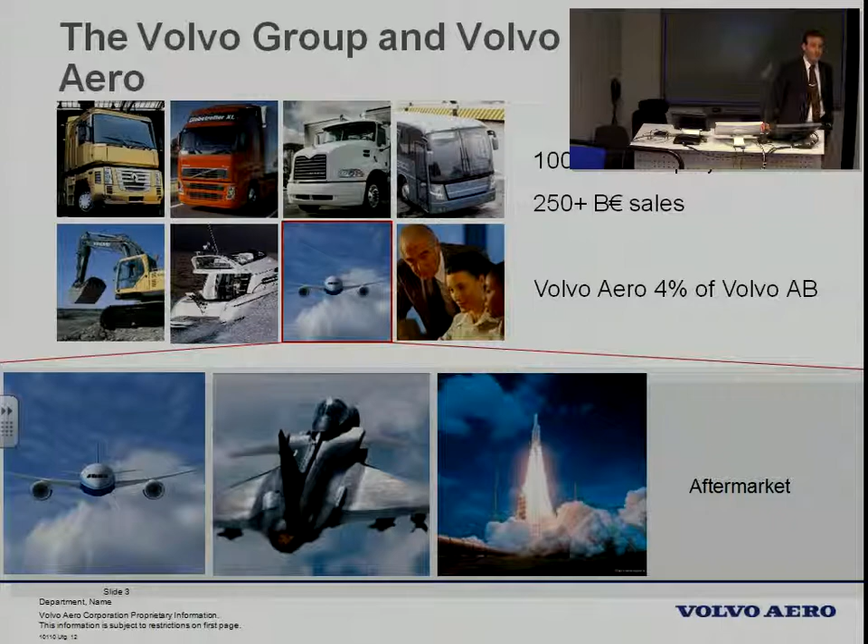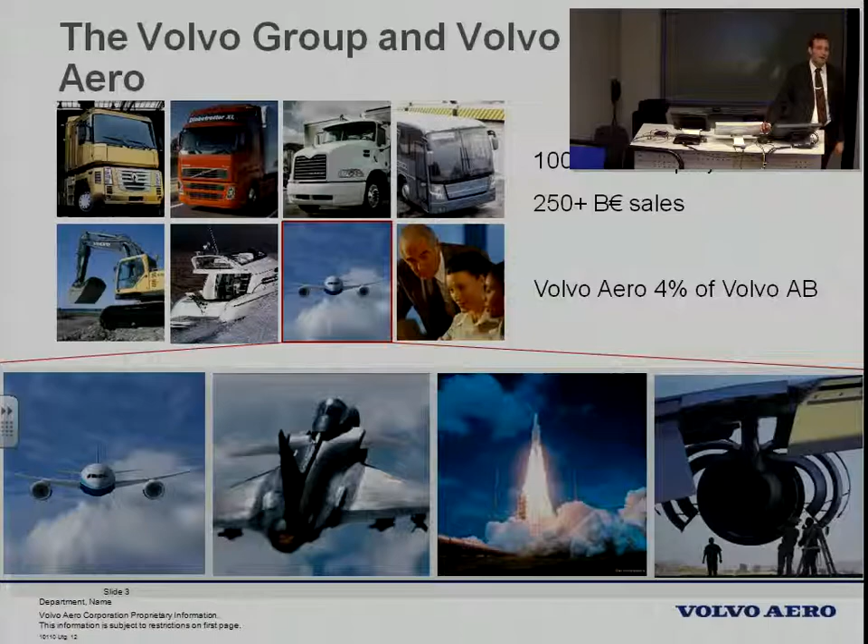We also have the military side, where we're responsible for the RM-12, which is in the Gripen or JAS aircraft. We also do some space applications, so we are actually the Swedish largest part of the space program in Europe. And we also have an aftermarket business which deals with repair and overhaul of entire aircraft engines.

So this is really what it's all about for us, that growth. It's a good word, and I choose it because it simulates, it's a symbol for the growth in the world. We are roughly 3 times as many people now than we were 50 years ago. Or to be more correct, the rest of the world outside Europe and US is 3 times as many. We are about the same. So that means that we are about 10% of the population.

During the Second World War, we were about half of the population in the world. And that's getting to us to some extent. There's a bigger market, there's also a bit of competition. So being in this growth world, doing business is quite good. That's quite especially if you look into traffic growth, it's been growing about 4% annually, with a few dips when recessions or incidents have happened.

But it also has some more subtle, or important, consequences. One thing on the safety side which is important is that the number of aircraft incidents or failures, the total number, may increase, although we actually have more safe systems. And that's a pedagogic thing to explain, because aircraft accidents are always reported.

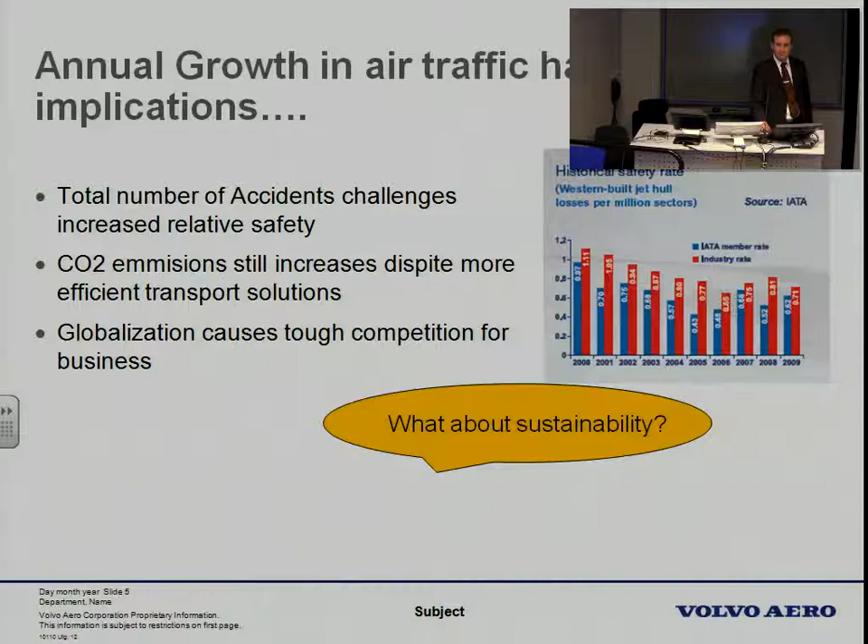Although we do things more efficiently, with better engines, we still have a problem with increased emission of CO2, for instance, because the growth is bigger than the reduction or efficiency gain. And obviously the competition thing is also there. So you can ask yourself if this is sustainable. Is this the way that we can continue to work? That's definitely something that we as individuals consider daily nowadays. But companies have a bit of a problem to relate to that, actually.

Anyway, there is a need for innovation, how to deal with these kinds of situations. And obviously, organizations, people, and companies act on this. Within our business, we follow some international agendas that we work with. In Europe, we have Acare, which has stated the promise of 20, or it should even be 50%, reduction of CO2 emissions until 2020.

And IATA, who is the aircraft or airliners organization, they have the vision to build zero-emission commercial aircraft by 2050, and also have a carbon dioxide neutral growth from 2020. If you break it down, it means an efficiency in terms of fuel efficiency that has to be on the level of 1% or 1.5% per year, every year. They have to become 1.5% more efficient.

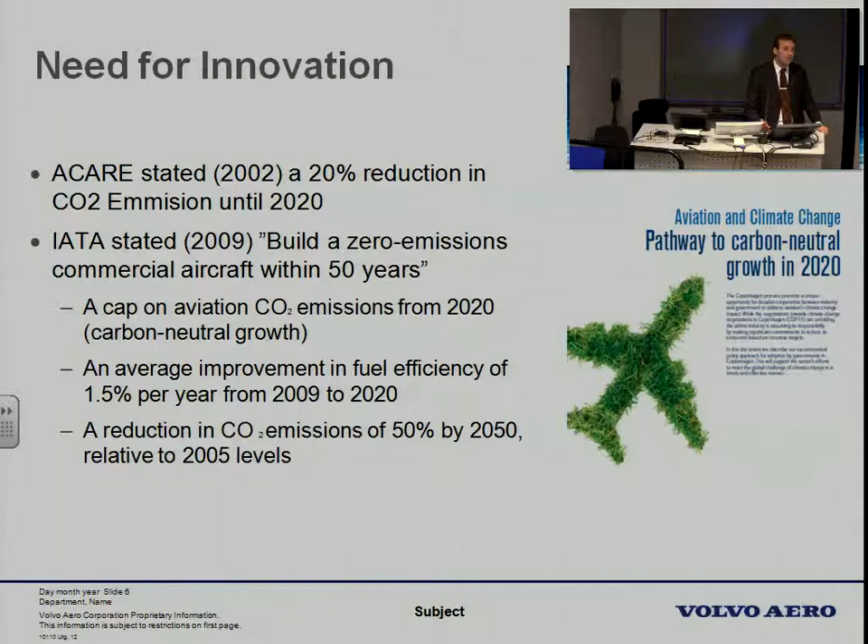They have stated this in these kinds of statements in agendas, and that's actually the policy that we follow when we do research, investments, and development. Acare, the other one, the European one, illustrates it like this — they did it a few years ago.

You can see the current CO2 emission, or actually the fuel consumption, which is quite close to that, listed from the 1970s — the aircraft that were launched around the 1970s, the Boeing 737 and Airbus 300, etc. They are still in operation, but they are being phased out. You can see how each generation of aircraft is getting more and more efficient per passenger.

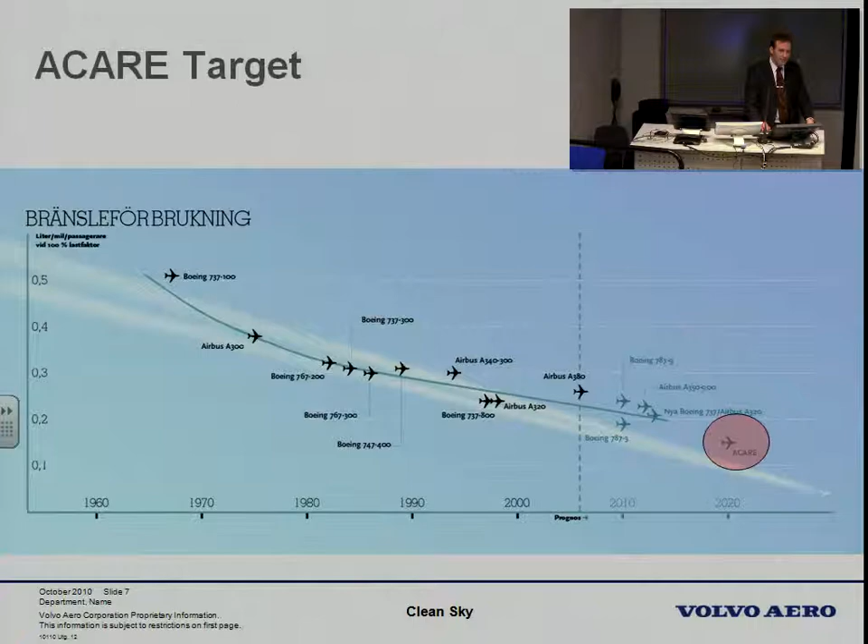The target, as you can see in the red area, is quite close and it's quite challenging. If you extrapolate a little bit, you can see that it's not an easy target to get. And 2020 is actually the engines and the aircraft that we are developing now.

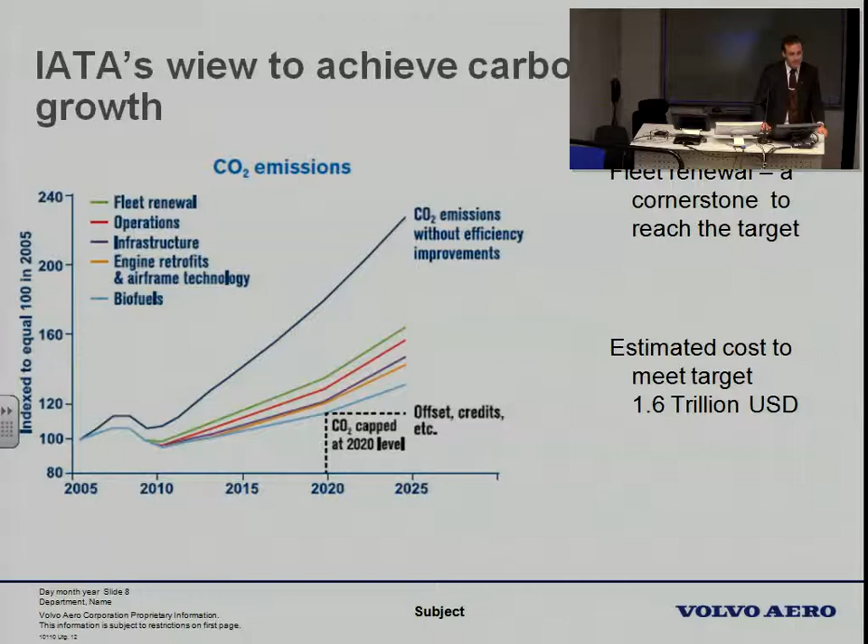IATA has a similar view. They've broken down how to meet these emissions. If you look at the large curve here, you can see how things would be if we don't do anything, if we just continue to let aircraft traffic grow without any action. The large gap down to the green line is actually fleet renewal, which means buying new equipment, and that's very good for us on the manufacturing side. There's a big incentive to buy new things and get rid of the old ones, so in that way it's a healthy thing. It's quite ambitious - these 200 airlines estimate they will spend $1.6 trillion to meet these objectives.

So again, to achieve this kind of growth in some sustainable way, or at least without violating too much, we really need to think a bit differently. So what are we doing?

I'll say some words about what we do in Europe on the European level. We have a large program, a very large framework program called Clean Sky. How many of you have heard about Clean Sky? A few? Yeah. They've organized a massive amount of resources in research to validate and develop new technologies that meet these targets. They focused especially on carbon dioxide and NOx, and also noise emission - noise is considered to be an emission as well.

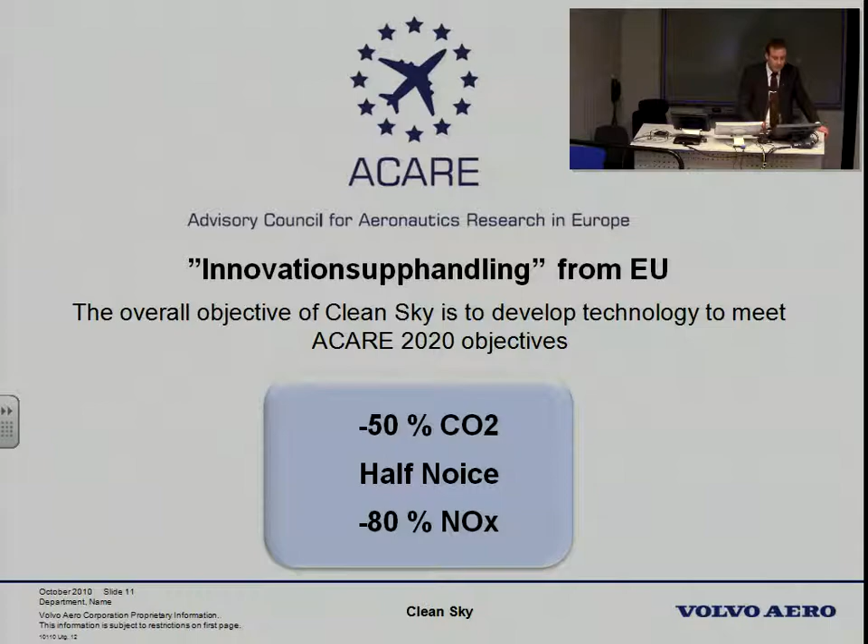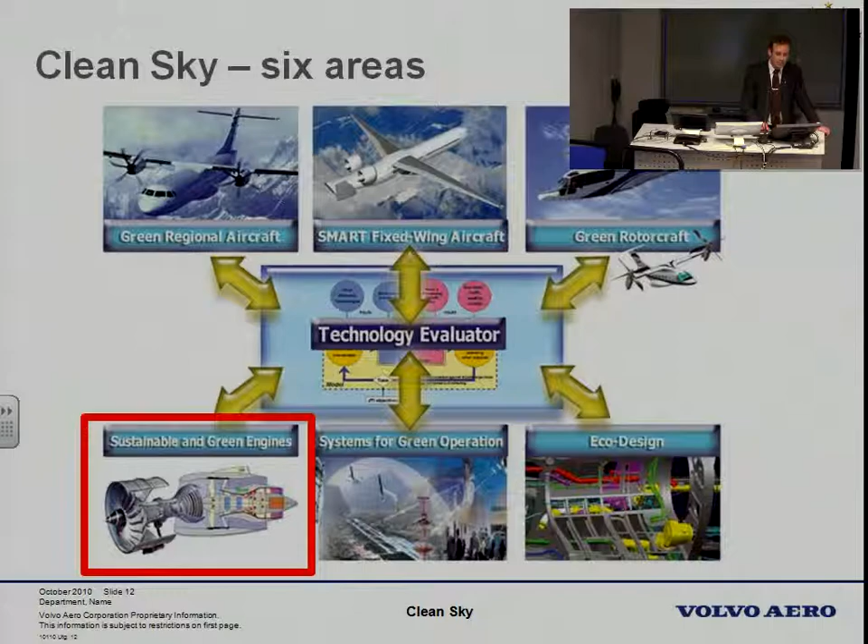So we are actually developing, together with our European partners, that kind of technology. It's divided into 6 areas. Several of those are on aircraft, on helicopters and equipment, and down there you have the sustainable and green engines, which is a portion of this initiative, where we develop several demonstrators - demonstrators in this case meaning building new aircraft engines that will be able to meet these kinds of objectives. You can see some of them. There are four, they're called Sage, and we are actually involved in doing components for these kinds of engines.

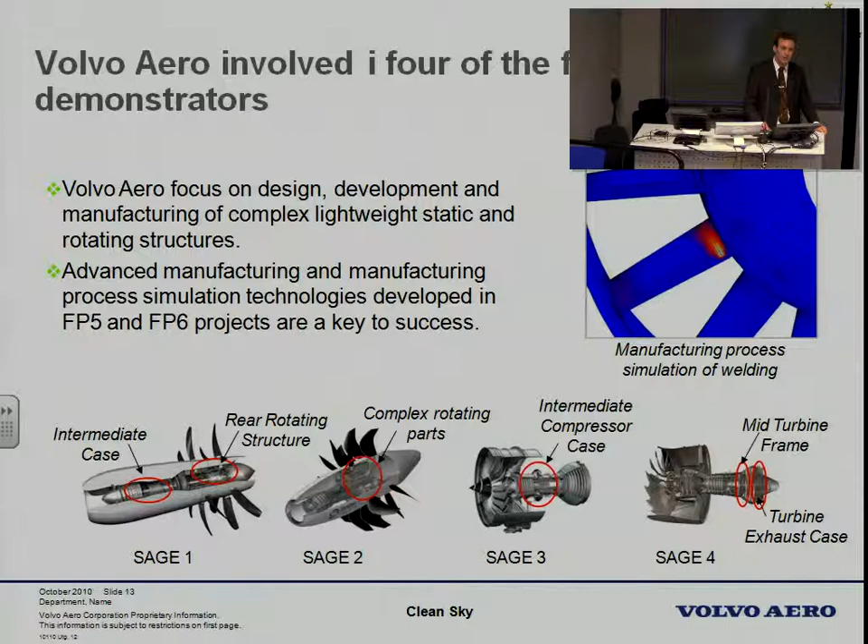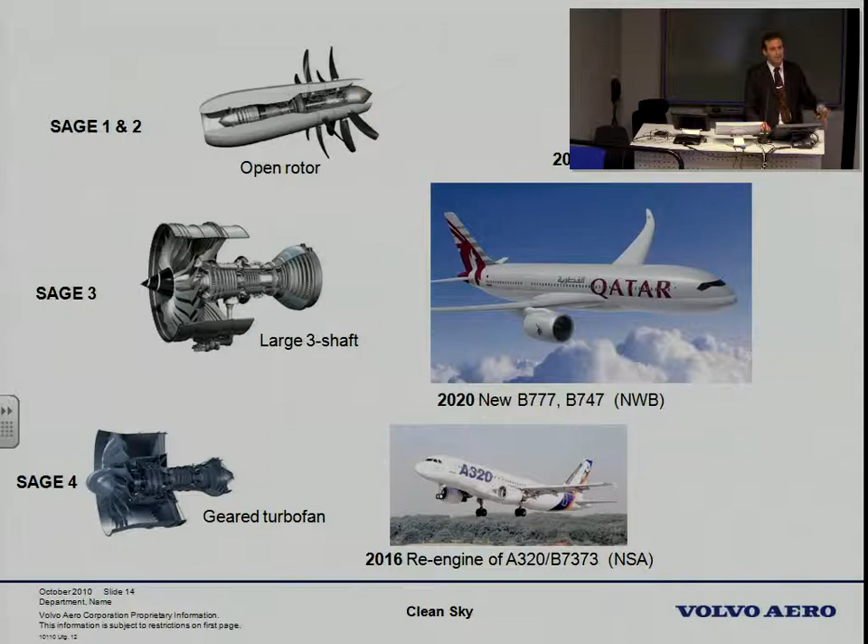As you might see, they look a bit different. The first one is a counter-rotating structure. You're actually designing a new architecture for the entire engine, so it's quite a massive shift for us. It's like putting the wheels on the roof of a car or something. They're tailored to meet aircraft, obviously, so in parallel, other programs develop aircraft that match these kinds of things. There are lots of technologies being validated in these programs.

If you then look into our perspective as a company, we follow a development thinking where we start off strategically at the bottom, doing a lot of research on identifying and developing technologies. We then validate them on the second level, the international program level. And then finally we do the development - the actual product development for the intended aircraft.

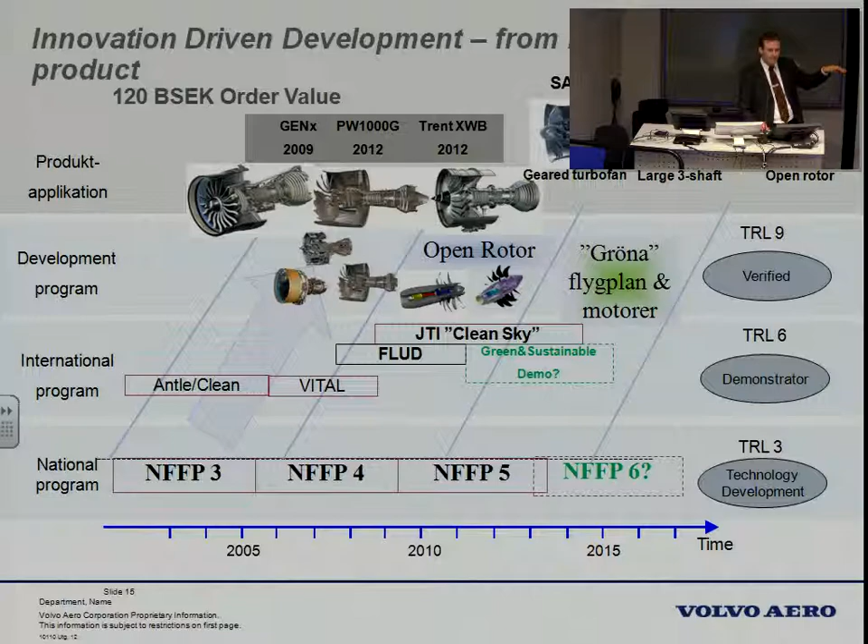So here it's important to note, when we talk about innovation, especially creativity, the further up you go in this, the more sensitive to risk you are. So when you're actually doing your development program at the top, you don't really want to have any risk at all. So product development from this perspective starts where you don't have any risk, or very low risk. The more creative side, where you find radically new solutions, is done on the lower level, so to speak, where we can do more explorative studies.

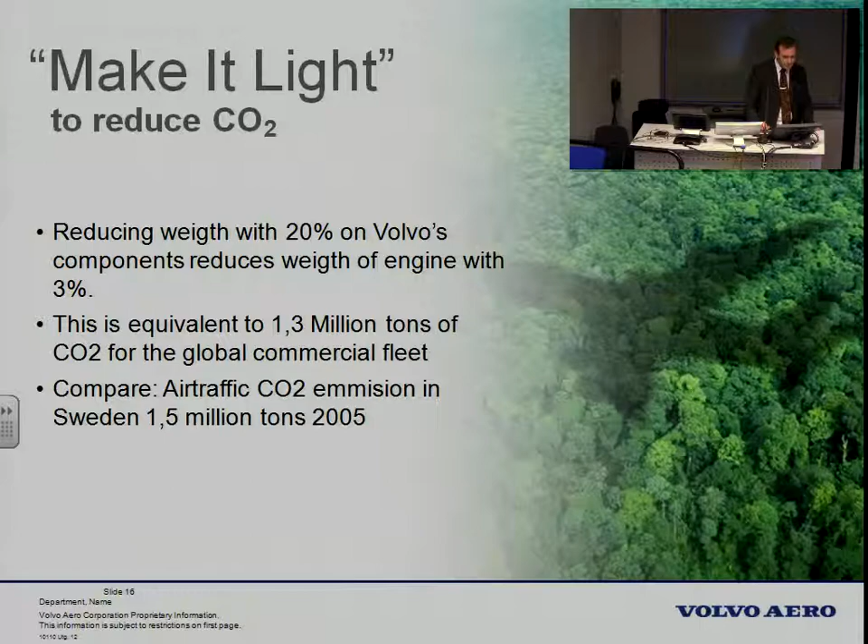Just to conclude with our pitch on this: since we are not doing the combustors and those things in the engine, we are doing the skeleton parts of the engines, the structures. Our main contribution, initially at least, is to provide low weight. So we try to make the components as lightweight as possible, and that actually has a quite significant impact on carbon dioxide, because it's very expensive to lift and transport weight through air. So if you can make things lighter, there's a lot of gain.

So far, it has been quite, I would say, traditional if you are a technologist. You see the targets, you can derive the targets from that, you can actually formulate requirements for what would be required for a new product. But is there another way of thinking? Perhaps. So this is the first question to you: is there another way in which we can reduce fuel consumption, or CO2, rather than developing a lot of technologies? Open question.

Good, that's definitely an option. But then we must put another boundary. If you want to fly, or go from A to B, let's say across the ocean, in some limited time, if you accept that, then is there another alternative to reduce that fuel consumption again?

I think it's much simpler. You can actually land halfway. Then you don't need to fuel the aircraft very much, so you don't have to spend fuel to carry fuel. Obviously it takes a bit of time, an extra hour or two, but this shows you can do other things than simply improve the efficiency of each component.

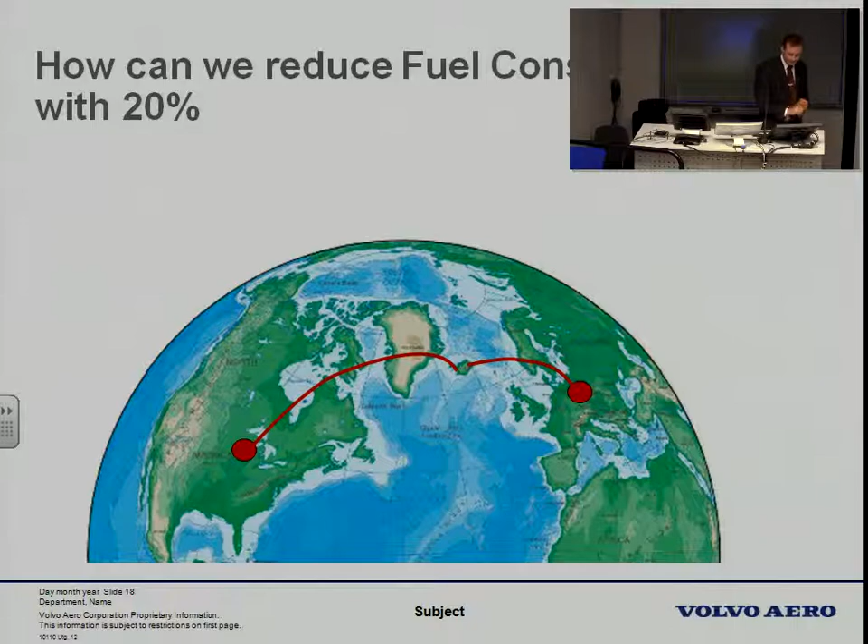So what I'm driving at is that there is a system here, and often the solution may be a combination of technology and something else.

And we can see this happening, you've probably seen it as well. This is an example from Volvo Car, I don't know if you've seen it, it's been on TV this fall I think. They provide a service where you can, they call it Service 2.0. For a small fee, you can actually get an upgrade of your software every time you visit the workshop. You've seen that?

I think it's quite brilliant, because what they actually do is they don't have to bring back the cars. They can actually upgrade them and charge us for that, providing it as a service. The alternative would be to call back the cars, at least in some cases. It's just one example where you link a service with the product provision.

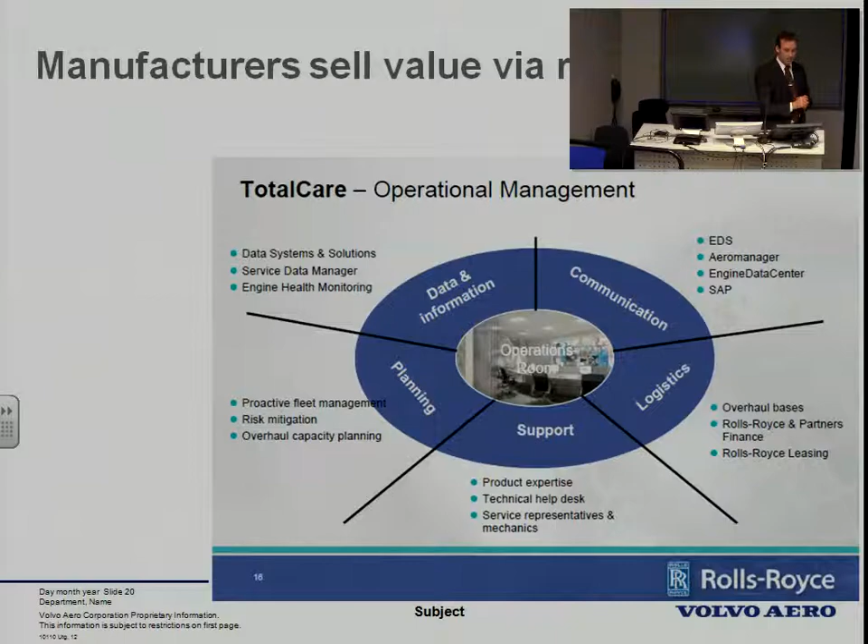In our business, on the commercial side, Rolls-Royce, one of the OEMs or aircraft engine manufacturers, provides something called TotalCare, which means basically that they take a lot of responsibility for how to operate the engine, and they also have an economic model to charge. They pay per use basically, so depending on how much you use it, you also pay for maintenance and things following that. So they actually have another accounting or billing model.

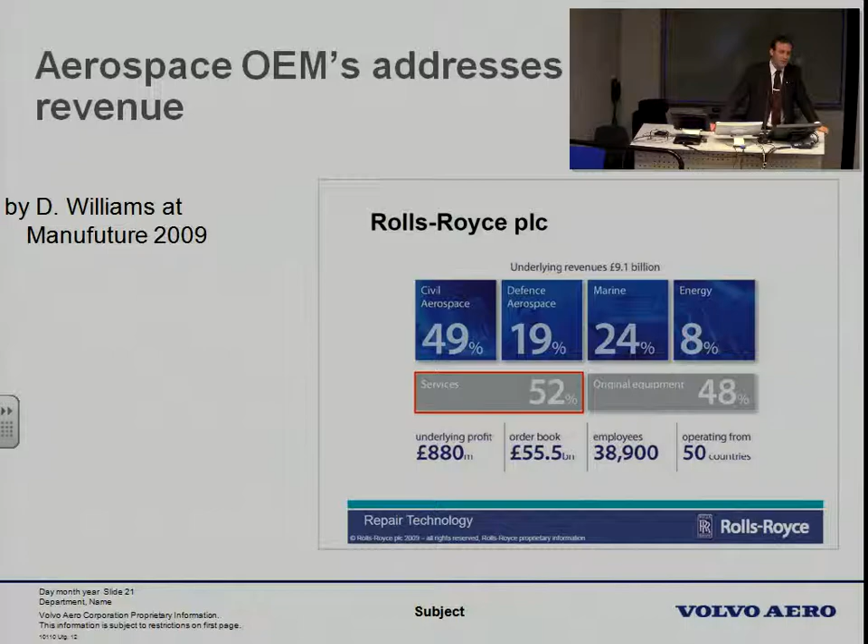And that's quite simple, because the so-called aftermarket, or after-sales market, is quite significant from a revenue perspective. So Rolls-Royce actually earns some money from selling the engines, but the main part is from the after-sales business.

It's actually led to us redefining, that traditional areas such as manufacturing have another definition nowadays, at least according to European policy documents. If you read this, manufacturing is a means to creating value from things that are made and recovering maximum value from the product or product idea, including delivering service through life.

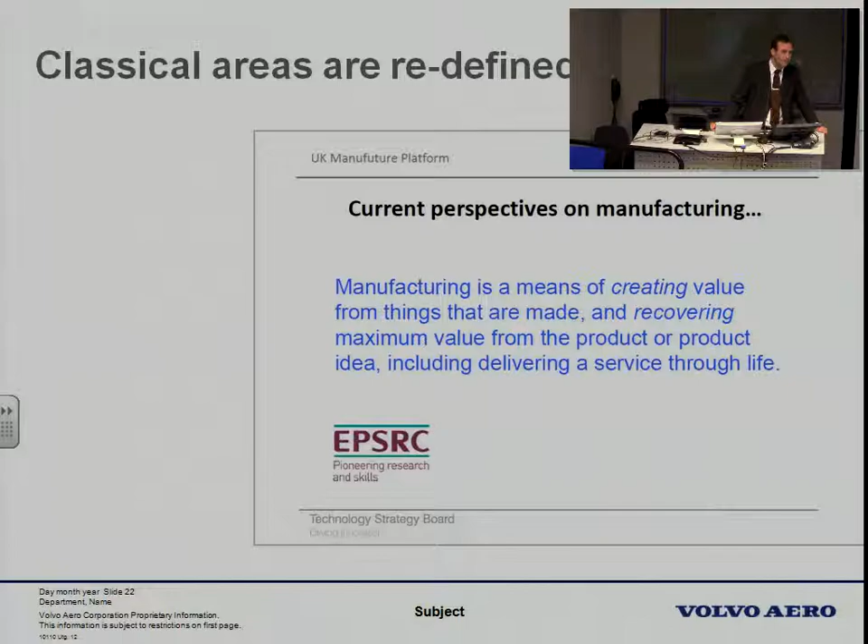So this is the European way of defining manufacturing. I don't really remember, but I don't think it was the same way 10, 15 years ago. So this is a way to see that what we are doing in manufacturing is a little bit more than simply cutting and assembling pieces of equipment.

Okay. By now, I hope you get the idea that there is something going on out there that may impact how we do innovation, how we bring things to the market. Okay? So how do we do then? That should really be an open question as well.

But the Volvo Group has an ambition, a clearly stated ambition. The CEO of Volvo, Leif Johansson, stated a couple of years ago that by 2015 we should double the amount of revenue coming from what is called soft products or soft sales, which is essentially the add-on services for our products, the physical products. The definition is that soft products are all the products and services sold to a customer that enhance the customer experience and satisfaction, other than the sale of new vehicles, equipment, or engines.

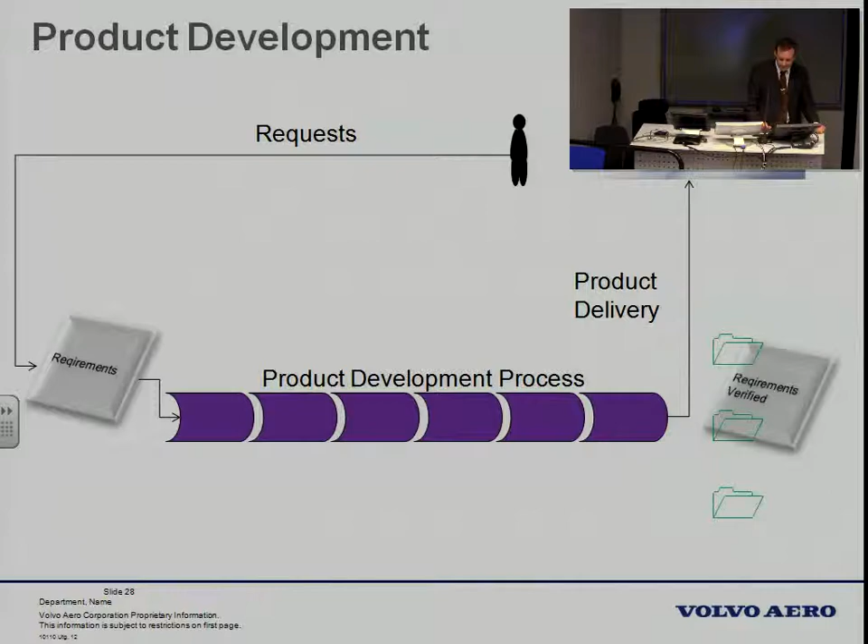So what's then different from traditional product development? This is a very high-level, simplistic picture of product development. There is some kind of market analysis or request or agreement with a customer or user, and then you have some kind of requirement specification based upon that. Then there's often a product development process you run through to develop these products. In our case, we verify each requirement, find solutions and verify those, then we are safe and deliver a product.

If we then talk about solutions or product service systems, we loosen up the idea that it's only a product that will be the end result. Then we should actually start off looking into the needs, understand the need, and then deliver some kind of fulfillment to that need.

In our case at Volvo Aero, it's quite tricky because we do something called contract-based development, which means that we negotiate everything. You remember this flow where you develop things from technology to validation and products. We do a lot of negotiations just before we start, so we tie up the requirements in contracts, and then once we have defined the contracts, we can go on doing development, and we don't want to divert from that because that's quite risky.

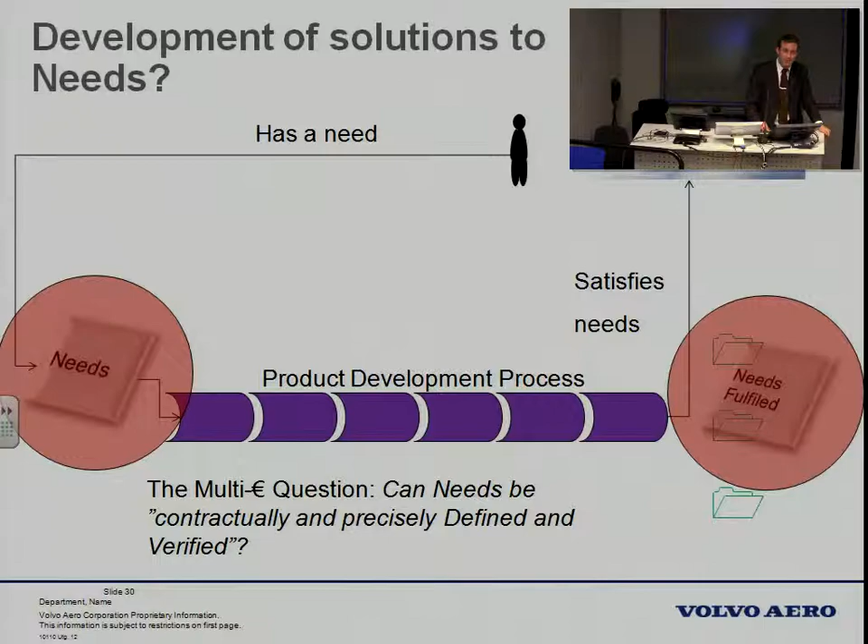So how can we actually define precisely the needs? That's probably not possible. And how do we verify that need? Can we really use the traditional product development process that is actually defined in quite a few of the development companies around?

Hang on that for a second. Then we go back and start with the basic things in service, where you actually have a service provider, which could be a manufacturer as we've seen, and we have a user - those two roles, a green guy and a black guy.

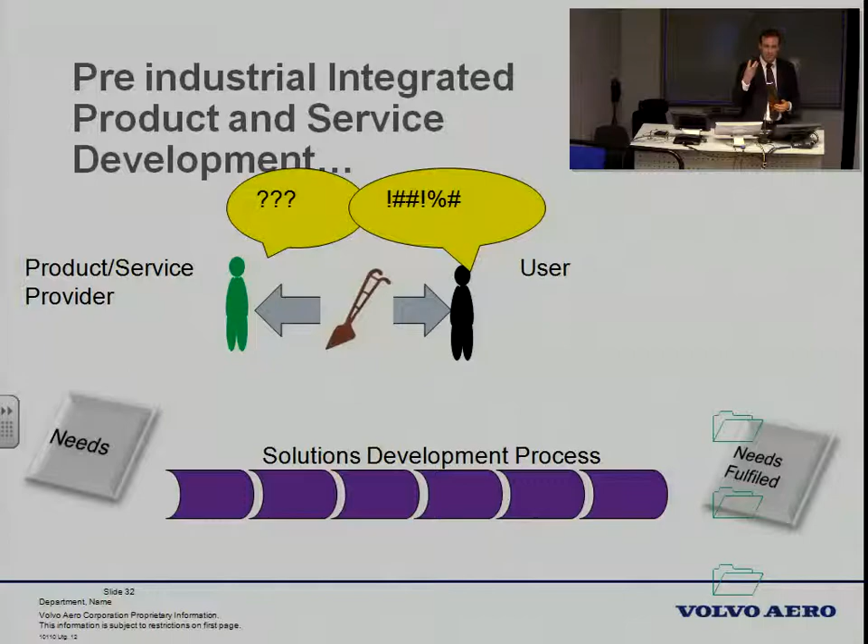Let's look back at what happened roughly 100 years ago or more, in the pre-industrial era. How did you do when you wanted a product? Well, you found some handcraft guy who could explain what you needed, and he could query back and ask what do you really need? Would this do? That's a negotiation. And then you started to develop things, and he probably interacted with you quite a lot.

The same way as we actually do today with carpenters back home. We think that we buy a new kitchen, but then when they come, they have ideas and negotiate, and hopefully in the end you have some kind of satisfactory solution.

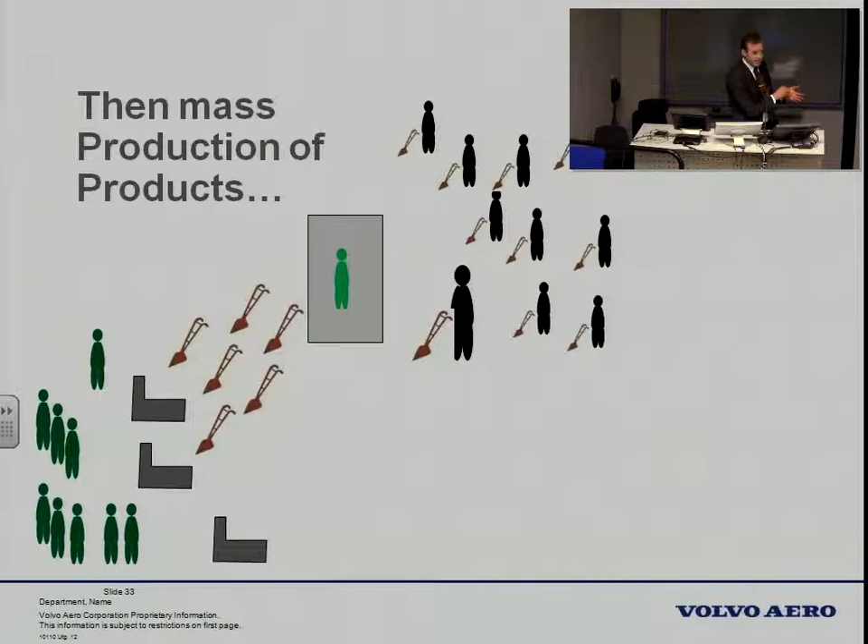Then someone said that this is not very rational because it's too expensive, and you start to do industrialization and economy of scale kind of things for 100 years or so. And what actually happened is that the ones who did the things, they lost contact with the customers. But they were very skilled in doing the artifacts and the physical things.

And you can actually see this - now we've been talking about supply chain integration and everything for some time. You want to facilitate the dialogue within the enterprise, and you have a number of companies that have to be organized together. For us, we are actually on the third tier here.

We have the customer, which may be a passenger, and then you have the airline providing the service to the customer, and then obviously you have the manufacturing chain with the OEMs and the aircraft manufacturers who provide the equipment for the service provider, and then on lower tier levels we are providing components for those engines, etc. So it's not very easy for us.

Who is the customer and who is the user? It's not easy for my colleagues to relate what we do with some kind of user service feature. There are links, but they are not always that easy to trace.

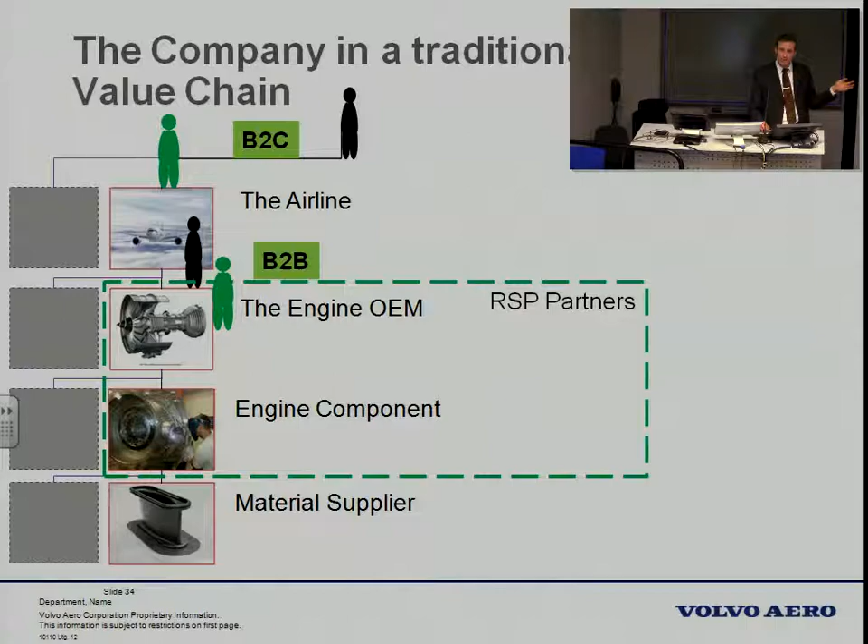So you have a business-to-consumer relation in the end step, but the rest is actually business-to-business relations, meaning there are professional companies and contracts being signed. What we do is we develop these things together with the OEMs, and we do business contracts. We are actually a part of Rolls-Royce when they provide the total care.

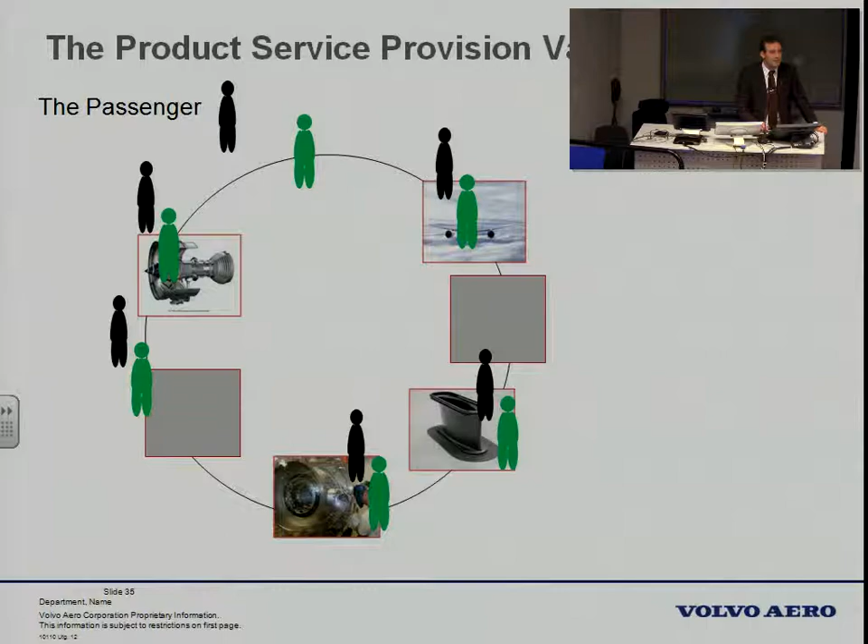Looking a little bit future-wise, the ideal picture would be that we have the user situation near at hand, or we understand it perfectly well, so we know the needs of the end product. So we can do trade-offs on any level, and we understand that relation. That would be theoretically at least an interesting idea. Then everybody in the chain would know what they are doing and what kind of value they provide. The truth may probably be somewhere in between, but there is at least a good trend towards recognizing the understanding of user value in the end.

So I'll make a short pause here to summarize some of the challenges. There are probably more, but one of them is value versus cost. If you look into manufacturing industries such as Volvo Aero, there's quite a lot of focus on cost because that's a competitive means.

Naturally, so it's easier to reduce cost by one krona than actually gain a krona, because you have control over the cost yourself most often. But if you want to provide things as a service and add value, that should also be a driver for development. This is something we look into in research together with LTU.

It's also a bit of a cultural and organizational challenge, because all these large manufacturers such as us have developed organizations and cultures and decision principles and tools to deal with the fact that we develop an artifact only, and then someone else does the business. Hopefully the marketing or business guys do it, but it's not very tightly coupled, to be honest.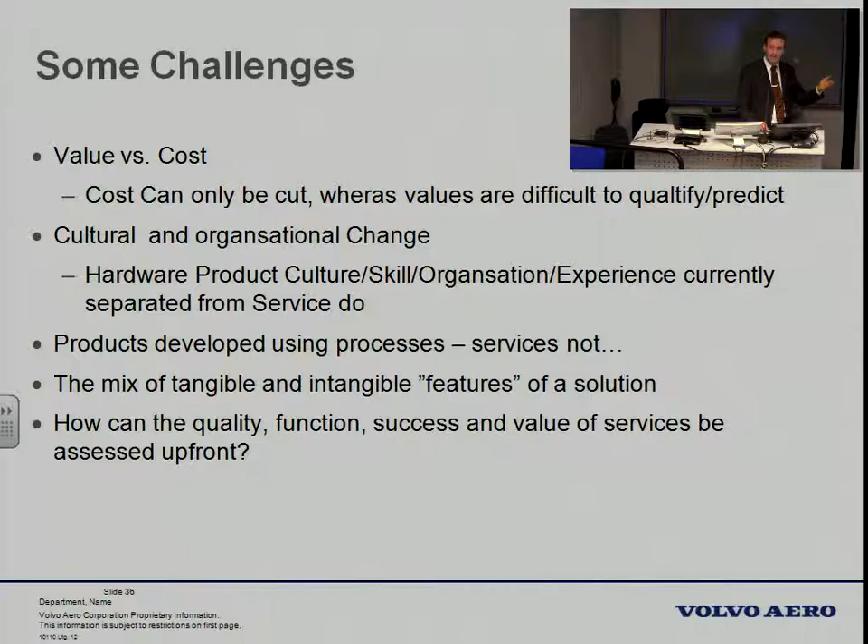We can try, we have. These kinds of questions are the kinds of questions we have to answer. And it's probably true that the ones who can answer and understand these questions well probably have a good chance of being successful, because they can do something good out of it.

So we have some examples. We've actually started a little bit. We've recently developed a process within the Volvo Group. We already have processes for product development, the physical thing, but we have now actually released a process for service development that's intended to be used in parallel or together with the hardware process.

It doesn't look like a process, really, like a block chart with things. It looks like a series of iterations, and it's done deliberately so visually, because there is first an exploration phase, then a conceptualization phase, a building phase, a test phase, and a launch phase, all within which you actually interact with the user and customer. So you have that kind of loop.

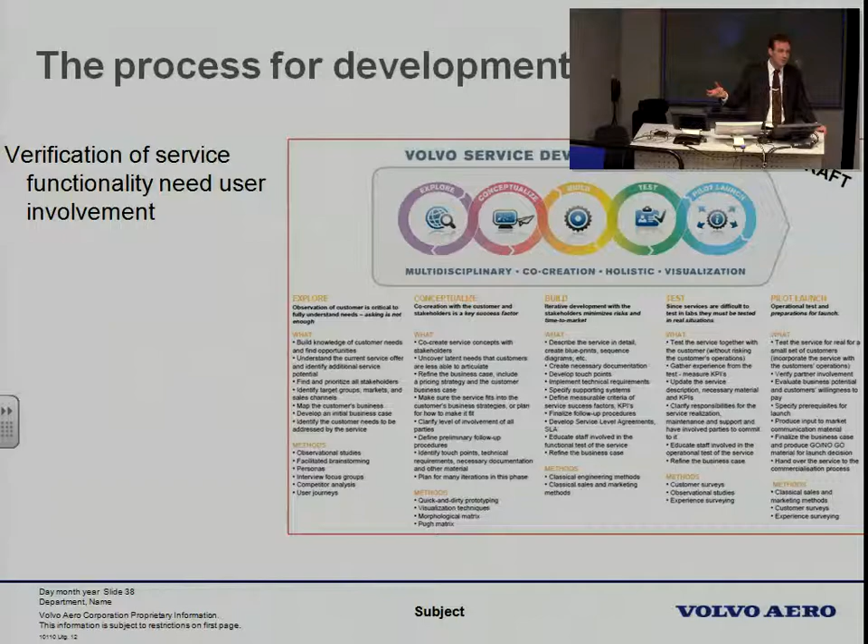Of course, you need that to be able to at least get some kind of validation or verification of whether the service is good or not. So it's a bit of a more co-creative process. Funnily enough, that has also been considered a criteria for good product development.

If you go down to the engineering level, does it have any implication there?

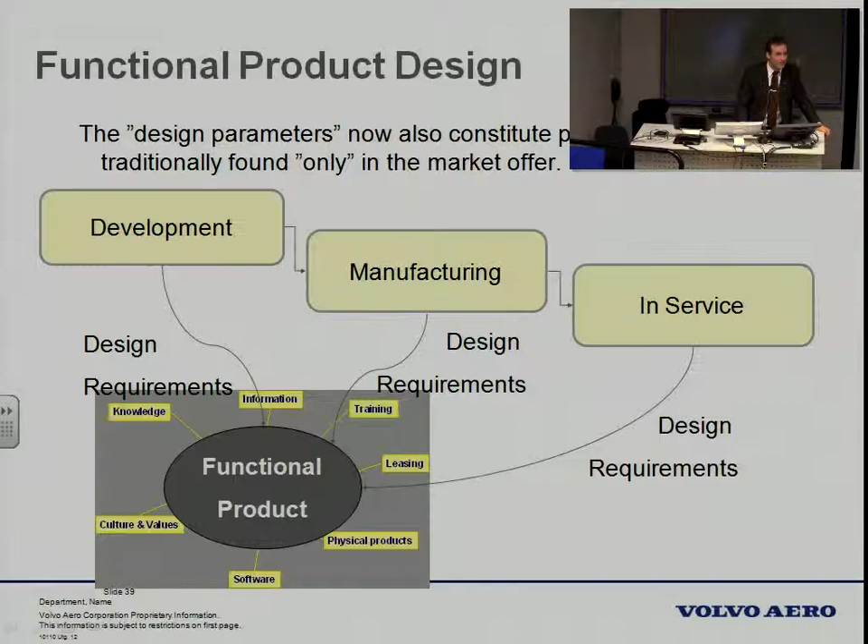This is a result from one of the development research projects we did here a few years ago. We asked ourselves, is it possible to actually at the same time define a service and a product? We call it a functional product, and we did a functional product development tool or implementation. The functional product is seen as a product. We took a product perspective and said that the features of the product are actually labeled, so you can see them - training and information, knowledge and culture things. These would be properties of that product. So if you have that definition and include that, then you should actually be possible to model it, understand it, and define it, we thought, perhaps.

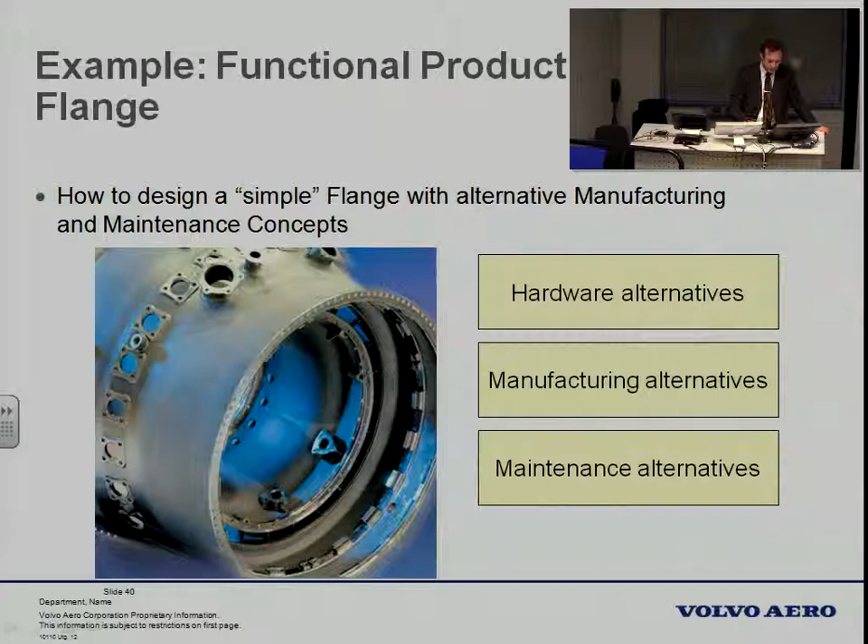So we did an example of a classical thing. It's very hard, it's titanium. It's a structural component within the engine. It's a very classical thing that we do at develop and manufacture at Volvo, and it's done with hardware-focused engineers. There's a lot of challenges within that as well.

A simple flange - we took that as the example and incorporated some of the life cycle effects and manufacturing and maintenance effects as properties. So we added those onto the product and actually tried to link those. In this one you can see a classical CAD interface where we actually put properties on each surface, and the properties were linked to the behavior of the product. So for instance, the tolerance, how fine or refined the surface is, or the tolerance within the holes or the flange, could actually be tied to how it's manufactured and how it's being maintained.

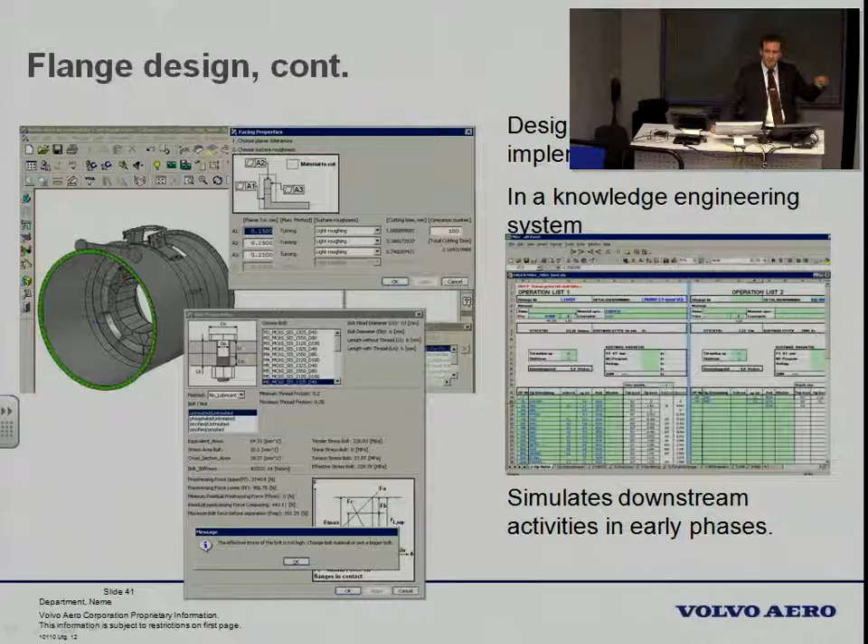And then you can actually, in this case, the table to the right is the operations list for manufacturing, which normally is based on a drawing setup, a set of drawings that the designer goes to the production guy with. The production guy looks at the drawing, or for that matter a CAD model, and then he generates this list of activities to be able to assess the manufacturability of that. Now it's actually being designed at the same time. So then the question arises - we generated this list automatically at the same time as we did changes on the product model. So then it comes to the question, who is really the designer? It may be the production guy who is sitting behind the table. So you can see it's quite a simple example, but it actually challenges a bit how we work.

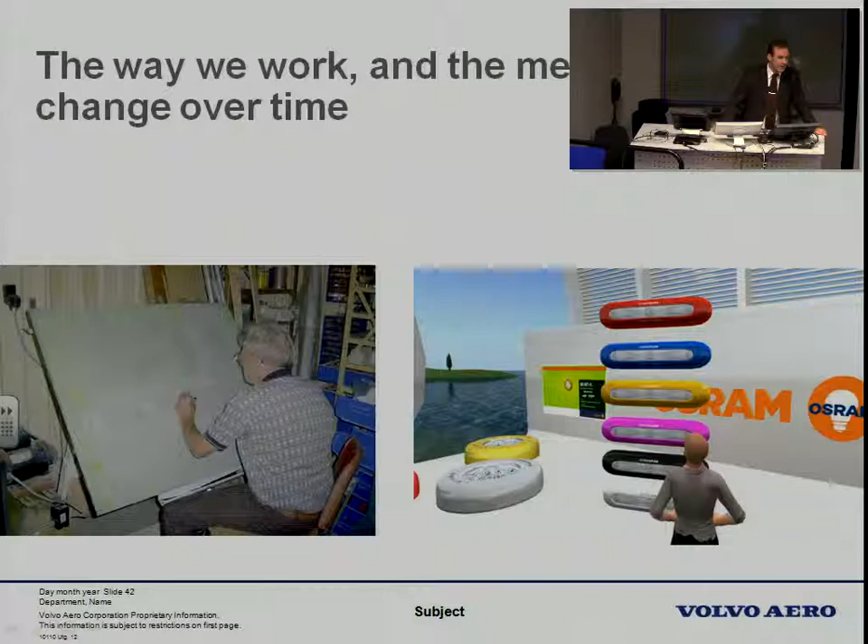And that's the second, or close to the last one. It's really the way we work is not the same. We use different means, and it changes over time. Very few - when I started working, we had actually a few guys working with a drawing board, but now we have to dig quite deep to find a drawing board. Whereas the new generation, your generation, and even younger generations, have a totally different means of designing or interacting with environments or computers or whatever. And we would like to use these means. So it basically says that things are changing.

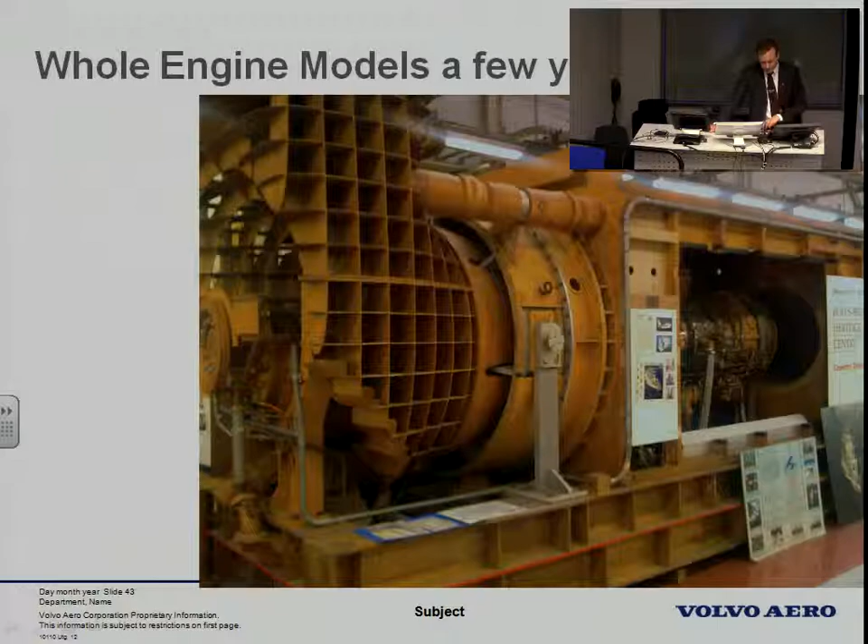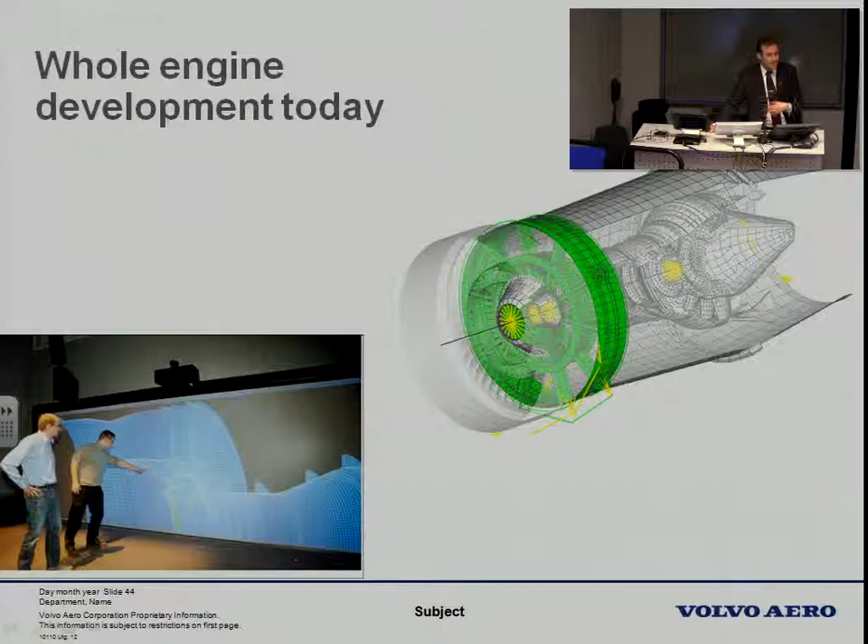And this is just one example - we did whole engine simulations before as well, but we did it by building wood mock-ups. We actually spent a lot of effort building prototypes out of wood to understand the mechanical behavior of the engines. Nowadays it's more or less virtual, at least in the development phase, where you can actually interact with a virtual model a lot easier than we did before, and you can definitely create these kinds of models more rapidly than we did before.

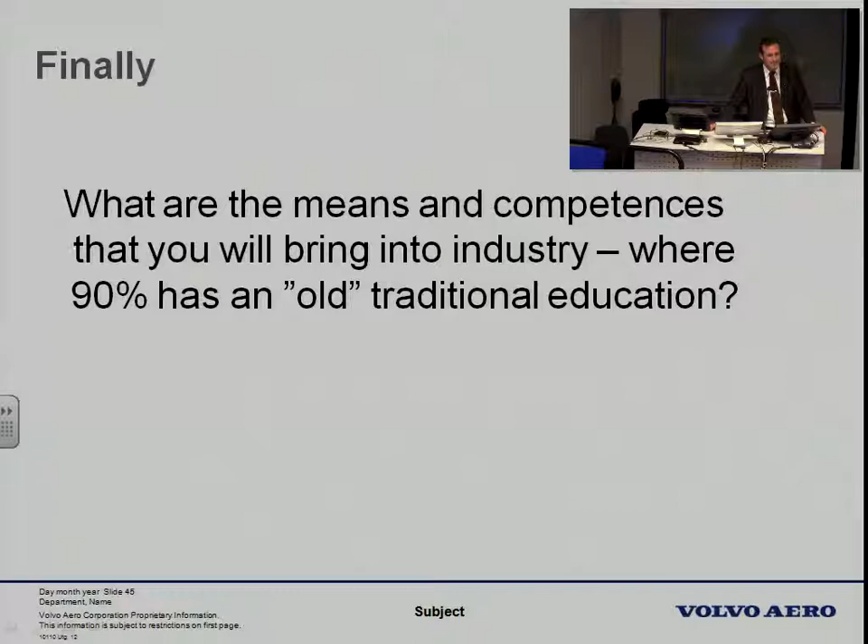I will actually try to summarize this session by raising a question: what kind of means and competences do you bring to us? Keep in mind that most employees at companies where you will start work actually have an education that is at least 5 years, probably more, old. The ones who take decisions actually went to school, hopefully university, perhaps during the 80s or 70s. So how can you actually, what's your contribution in this respect? And how can you, with your means and your insights and what you learn, bring that into improvements in how we work and understand the situation? I leave that question open, just as a consideration.

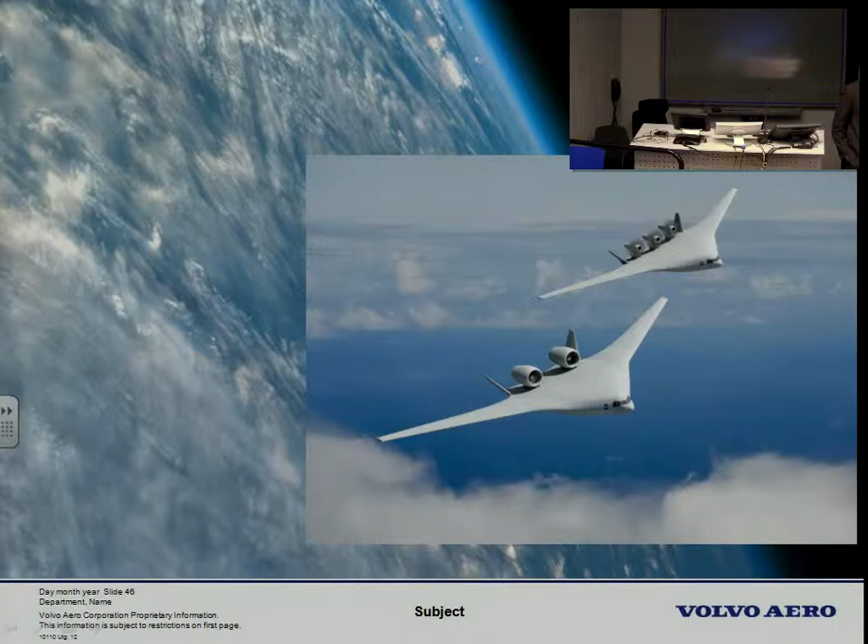Thank you, Ola. Very nice presentation, very interesting, raising some very interesting thoughts about product development in the new sort of millennium. Do we have any...